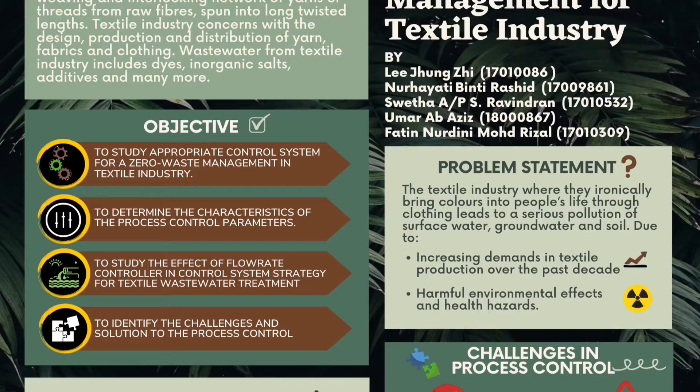Textile is a flexible material created by multiple processes, creating fabric, clothes, and material. The textile industry concerns the outcome of the product, such as the design, production, and distribution. With the current economy, fast fashion has always been a go-to place for shoppers.

Due to the processes that the clean water goes through from the inflow, the effluent water leaving the factory is actually highly contaminated if left untreated, especially with strong heavy dyes. Their presence degrades the water quality by a large margin. Therefore, in this research, we will find multiple ways, challenges, and recommendations so the wastewater treatment station can work with full efficiency.

For the problem statement, society is well informed that environmental pollution levels are rising with every year that passes by, though many do not know that the industries that make their clothing contribute a large sum of the pollution. The textile industry, which ironically brings colors into people's lives through clothing, leads to serious pollution of surface water, groundwater and soil, mostly due to the industry not treating their textile effluent efficiently.

The objective of this project is to study the appropriate control system for a zero waste management textile industry, to determine the characteristics of the process control parameters, to study the effect of the flow rate controller in the control system strategy for textile wastewater treatment, and to identify the challenges and solutions to the process control.

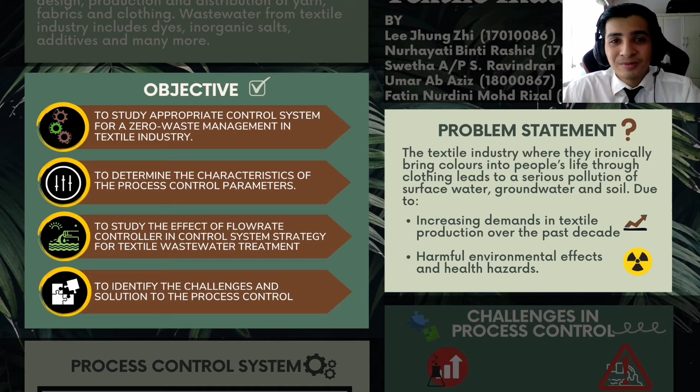The electrolysis procedure was carried out by passing a direct electric current through the wastewater from the anode plate to the cathode plate. The current caused the surface charge of suspended particles in water to decrease, allowing them to coagulate. The combination overflowed into the transition unit, where the coagulates easily separated from the water due to the fixed volume of the unit. The end outcome was water that appeared clearer and had lower turbidity measurements.

The sensors were used to measure the process output turbidity as well as the input waste flow rates, which were then gathered in real time by the microcontrollers. The control strategy intended to manipulate the wastewater flow rate to produce the desired turbidity. The difference between the target and the measured turbidity was read by the controller. The controller calculated the control action and sent a PWM signal to the driver circuit, which turned on the pump.

The change in turbidity was caused by a change in wastewater flow rate, which changed its residence time in the unit. The change was recognized by the turbidity sensor, which delivered a feedback signal to the controller. The electric current in this controller was assumed to be constant. Proportional and integral, PI, control was used. The use of derivative controllers is avoided since it will reverse P and I efforts and lead the system to achieve the set point at a slower rate than before, and the process dynamics are already slow.

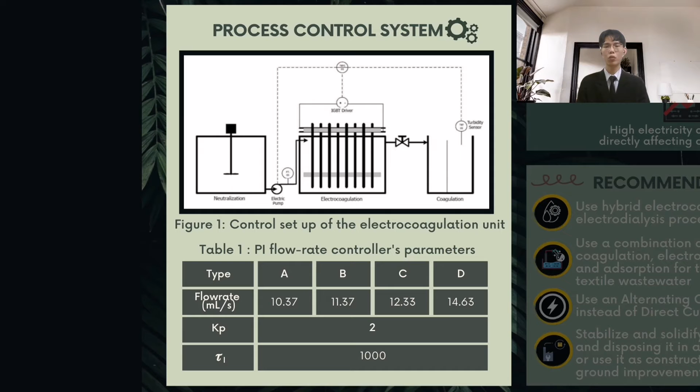When the turbidity sensor senses an offset, for example, the output turbidity value is higher than the desired value, the PI controller will send an electric signal to the flow rate controller, and the flow rate controller will change the flow rate of the input effluent based on the PI controller. Hence, the process variable can reach the set point, which eliminates the offset, and there will be no overshoot. As a result, the turbidity will always reach the standard of safe disposal and minimize the pollution of dye color to the river environment.

Moving on to the challenges concerning the process control in the textile industry. The first challenge is scaling of the process from pilot scale study to industrial scale. In pilot scale, researchers simplified it by assuming the effluent had been equalized and neutralized before the process began. First, liquid buffer with the specified parameters was used for simulating. In real textile effluent, disturbances might exist in the readings and consistency is not guaranteed, hence risking the control system efficiency.

The second challenge is high electricity consumption directly affecting operation costs. Typically, the process utilizes a direct current power supply as this supplies the system with both positive and negative charge from the connecting wires. However, this encourages the formation of an oxide layer on the cathode, also known as cathode passivation. This results in a restraint on the flow of current between the electrodes, which then increases the power consumption.

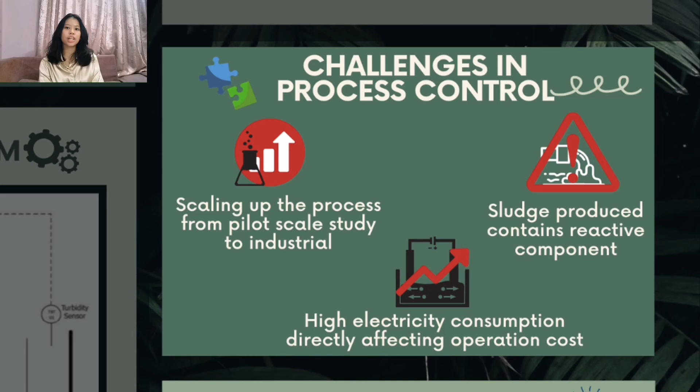The last challenge is that sludge produced from the electrocoagulation process contains reactive components. As textile wastewater is known to be high in turbidity, salt content, chemical oxygen demand, and total organic carbon, the disposal is still one of the tough and risky jobs. Though it is found that the process itself produces 60% less volume of sludge compared to chemical coagulation, the dissociation of metal ions from the electrode may affect the color of the produced sludge.

Recommendation. For the first challenge, which is scaling up the process from pilot scale study to industrial scale, there are two recommendations suggested. Firstly, to use a hybrid electrocoagulation electrodialysis process, and secondly, to use a combination of chemical coagulation, electrocoagulation, and adsorption for treating real textile wastewater. For the second challenge, the high electricity consumption which affects the operational cost, this issue can be solved by using alternating current instead of direct current.

The last challenge, the disposal of sludge produced from the electrocoagulation process which contains reactive components, can be solved by stabilizing and solidifying the electrocoagulation sludge and disposing it in a secure landfill, or reusing it as construction material for ground improvement purposes.

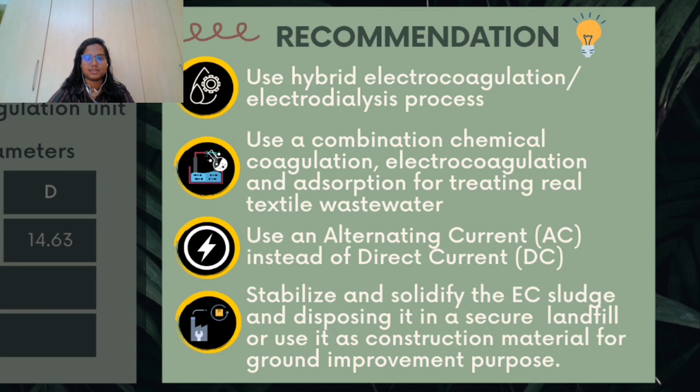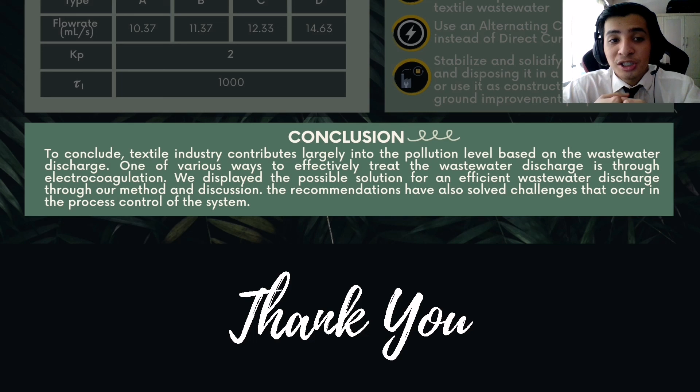To conclude, the textile industry contributes largely to the pollution level through its wastewater discharge. One of the ways to effectively treat the wastewater discharge is through electrocoagulation. We displayed the possible solution for efficient wastewater discharge through our method and discussion. The recommendations have also solved the challenges that occur in the process control of the system.